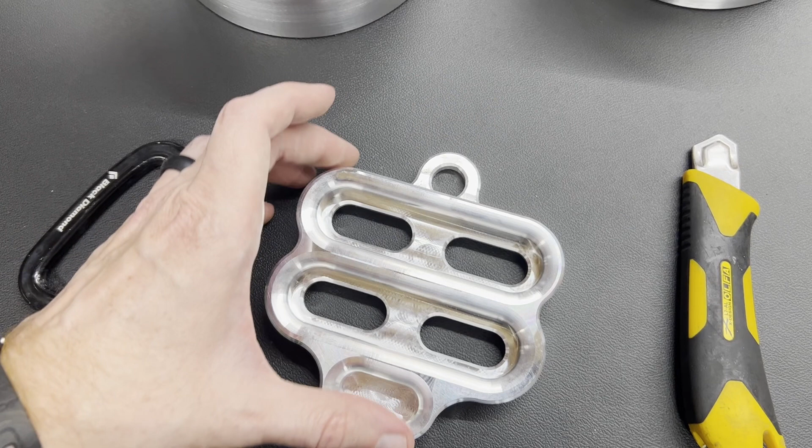So for the latest, I've got, and this is shining a lot, so a lot of glare. That's much better. Okay, so I have the new pinch trainer. So I explained this, but just with a CAD model. So if you clip into this eyelet here at the top, you have one edge to a mono here, and then two more smaller edges on the other side.

So I know that these are an 8 and a 6. It's escaping me off the top of my head. One of these is an 18. I think it's this one, and this one's slightly less. I think it's a 15. But I would have to double check that before I confirm, and this is something like a 25. Generous radii on this side, and then just enough radius on these ones on the other side.

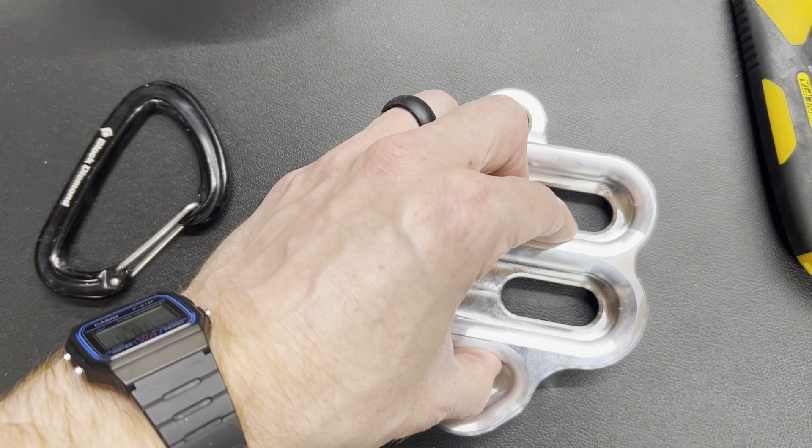So the way that this works is a bit unique. I haven't seen it done before, but you put your thumb in here, and then you have two options: holding here, which is limited by the eyelet, and then you can also put your fingers in here. So you have two different edge depths, and I think those are the most common. But the way that this works is you have these holes in here, which if you've seen my video for the sloper trainer, these work exactly the same, a carabiner goes in either one of these holes.

And a cool feature of this that I have not seen anywhere else is that neither of these holes are centered when you're pinching it. So you have either closer to your forefingers or closer to your thumb. And this is by design. So now I have a regular pinch for comparison. This is roughly the same width as using this outside.

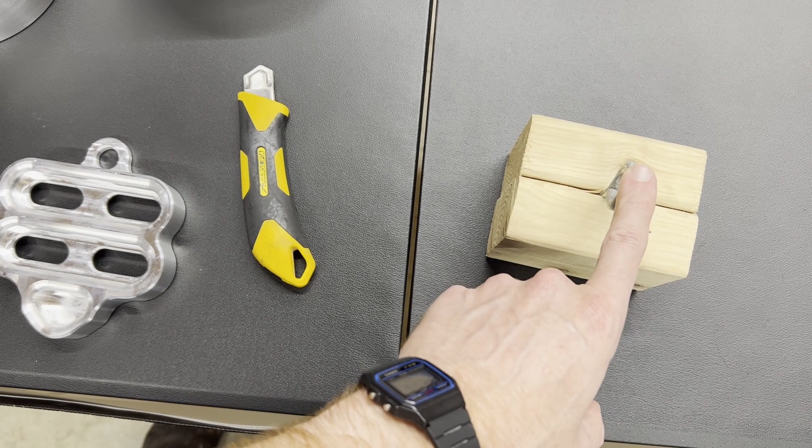So I was able to test this, and mind you, this is not textured yet. So holding on to this is a bit challenging in and of itself. But with this pinch right here, and I tried to hold it at a similar depth as I would hold this, I was able to do 45 pounds, and I could probably do a good amount more, but I had 45 pounds on my loading pin, and that was done easily. Now, first of all, I can't do 45 pounds on this,

and if I am holding between these two and clip into here, I'm able to do 25 pounds. And again, I'm not micro loading it to figure out my exact PR, but it was 25 pounds. If I do it by clipping into here, I was able to do 10 pounds. So, no way could I do 25 pounds clipped into here. Now, that's important because when I do that 10 pounds, I'm feeling it the most in my thumb, more than any of the other tests that I did.

So it's the least amount of weight, but I'm working my thumb the most, which is amazing because one of my biggest complaints about pinch training is that I feel like I'm still just working the regular four fingers, and I wish I knew the name for this grouping of four fingers, but you get the point. When it comes down to pinching, the determining factor for me in most cases, especially outdoors where you're doing a kind of weird pinch, is that you have to activate the thumb a lot, and when I'm pinch training, I never feel like I'm using my thumb to its fullest extent, and I'm still relying mostly on these four fingers, which kind of, what's the point?

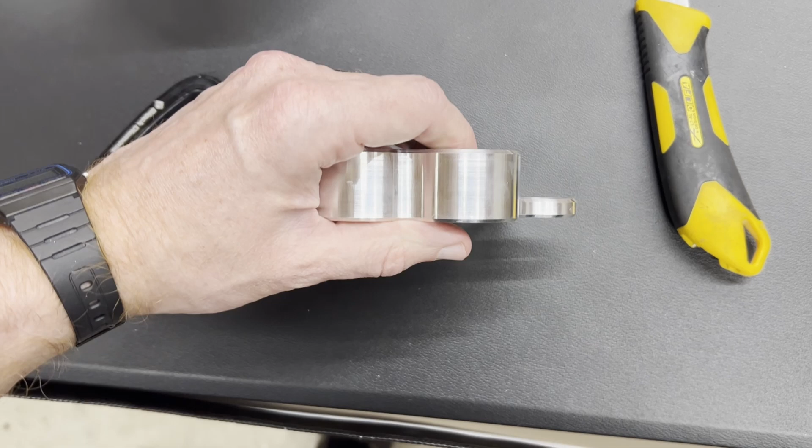So deadlift day and pinch training day is how I like to do that workout split. And this really makes that training philosophy even better. So that's why I designed it. That's how this works. And I will point out that the eyelet position on this is such that when you're using these holds, and this is especially nice for the mono, this will tip, it'll be this way slightly.

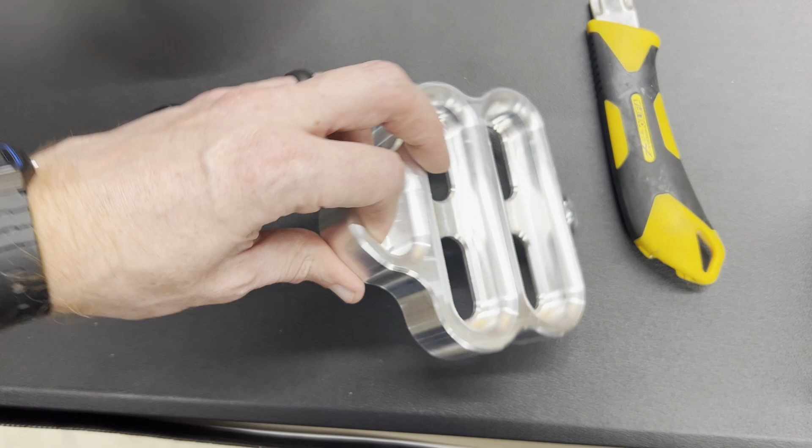And so that kind of makes it so these are all more comfortable. They slope away a little bit, which makes these two perfect for open hand and also the 3-finger drag training. And so this device is the first one in the line that really has holds that are specifically for the drag position. So it's kind of a neat feature that you get your pinch training, a mono, your drag positions,

and then obviously the eyelet on this side is closer to the face. So that will keep these holds, the edge will be perpendicular to the ground. So for these small edges, they'll still feel nice and as in-cut as they can. So you can do these 6mm and 8mm holds. And I was able to test that today and they work quite good.

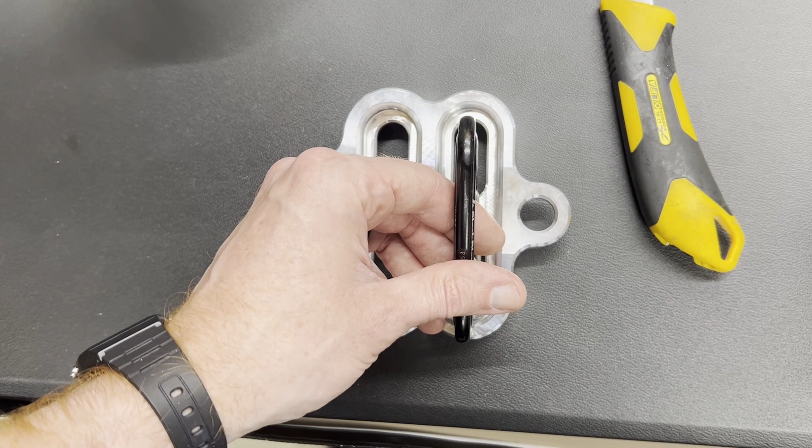I might make these slots a little bit less wide. They didn't get in the way, but the width of a carabiner is usually much less than that. So they don't need to be so wide, and I could get away with them being a little bit less wide. They might need to move out a little bit to accommodate larger carabiners.

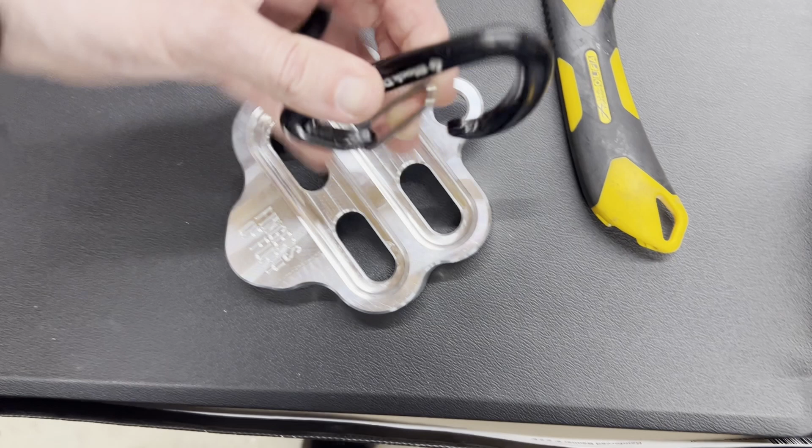This carabiner will work, and I can demonstrate that now. So that's pretty easy. That's how that works. The carabiner just snakes in between these two slots, and it works for both of them, obviously. And I tested that on this. I think these are probably for climbers the most common shape of a carabiner we'll see, they're on dog bones, and this is what most places sell. I feel like they all look the same.

And also these carabiners work, but the typical carabiners that you'll see for workout equipment also work in this. The ones that haven't worked for me yet are the locking carabiners, which I have seen some people use. So it's not a huge detriment that these are this width. So I might have to keep them this way to keep it a smaller package.

So right now I have this down to 14 ounces. So anytime I go up in thickness here or in width, since these are aluminum, the detriment of that is that it easily becomes kind of heavy quite quick as opposed to wood. So this is under a pound. It's 14 ounces, so that's 2 ounces under a pound. So it feels beefy, it feels nice in the hand, but it's not too heavy. And so that's it for this.

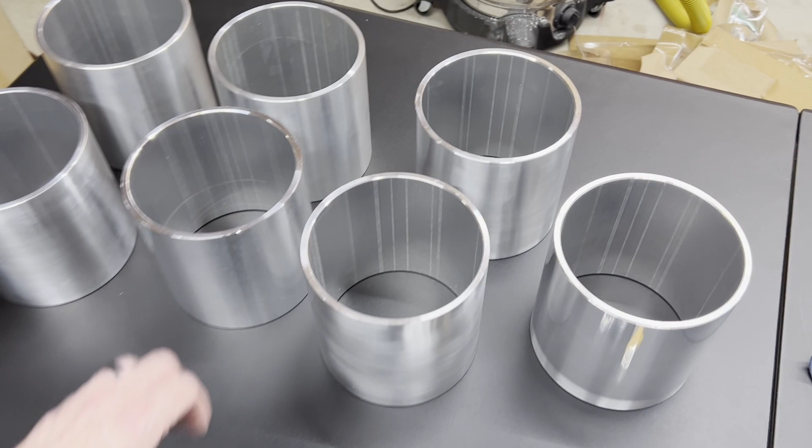I've got 7 tubes. I had a video earlier that the surface finish of the tube as extruded wasn't great. So what I did is I took these down in a lathe, turned the outside, turned both faces, and chamfered it. So without a CNC lathe, I just used a manual lathe.

That's labor intensive, but that does allow me to do a test where I'm probably gonna give one away and then sell the rest, and I'll see how fast they sell. If they sell really quick, that will at least give me some idea that these might be popular, and maybe I need to bring a CNC lathe in here so I can do these more effectively. But if they don't, then no CNC lathe, I won't worry about it, and you'll never see them again.

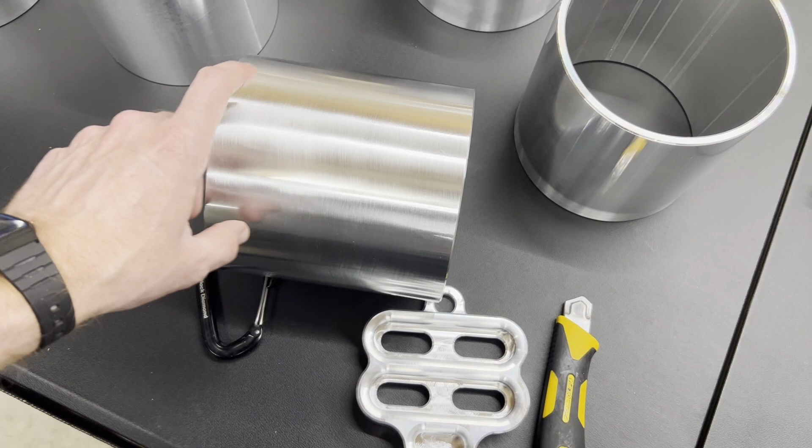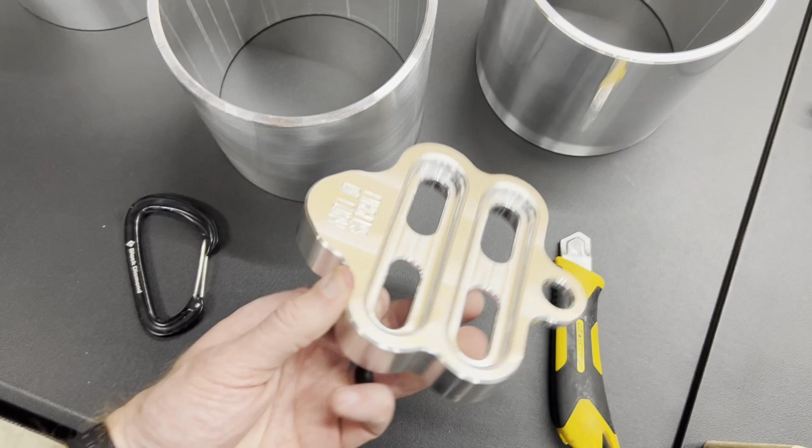But for those who didn't see it, I cut these similar slots into this, and I'll put a little logo on here. I need to come up with a new logo for these actually, because there's not much space to put a logo on these. I know obviously the surface area is huge, but I only like to mill a small flat here and put a logo here. So probably just do like 3 letters, but I need something because right now it's the full name. I don't have nearly enough space for that unless I get a laser engraver and I can engrave on an uneven surface.

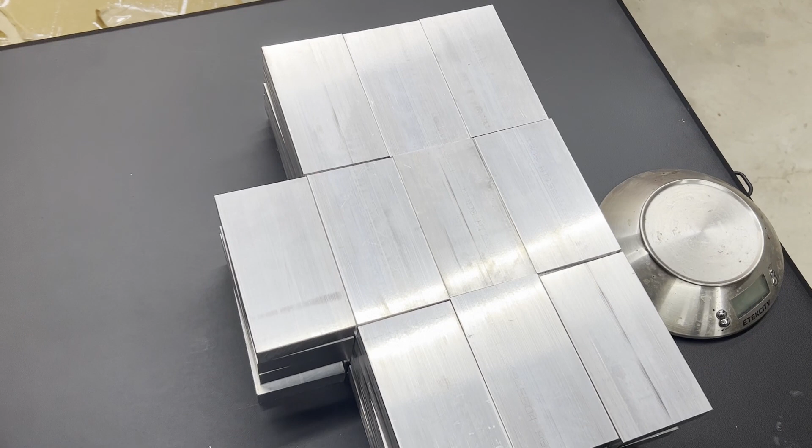So then the next thing, the important thing, is that I've got 50 pieces of stock for Baby Boss boards. So that's these right here. So you'll see those coming in soon. And then the last thing, which I'm gonna move over to the computer and show you there.

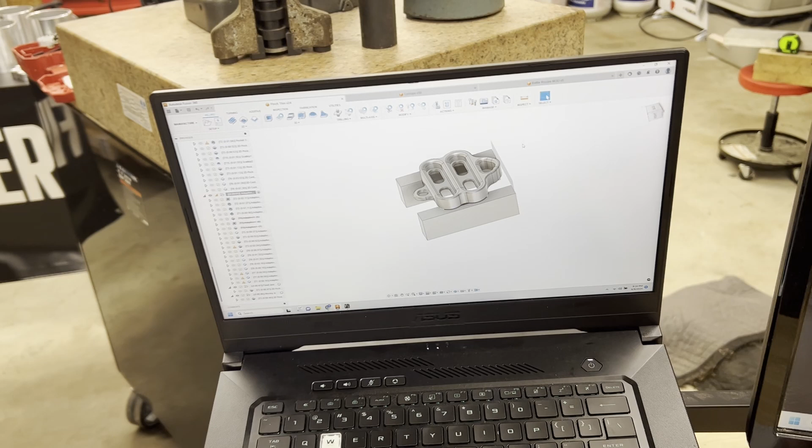All right, so I'm back on the computer, and I apologize, that's just the camera facing the computer and I'm not screen recording, but let's do this. So this is just the setup on the machine. I made some soft jaws for this part because this is an uneven surface and they don't lie in the same plane, so I had to make soft jaws.

But what I want to show you is, and I apologize, you can see some of the messy garage as I'm getting ready for a new compressor and some other stuff in here.

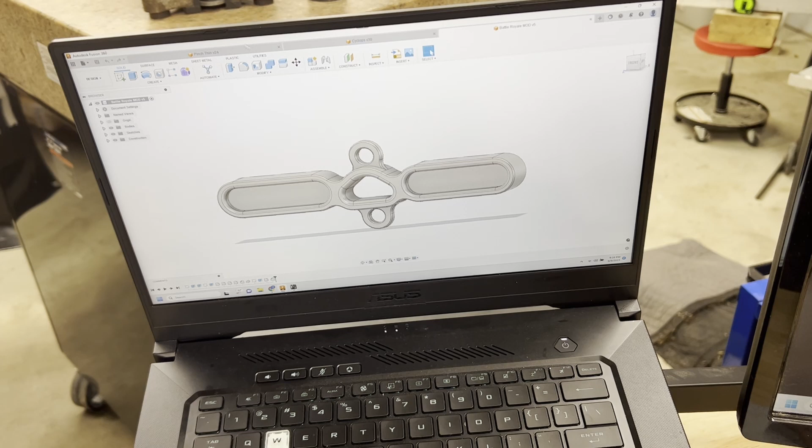Okay, so this is what I am right now calling the Battle Royale. This is another portable hangboard, and I'm hoping this will be the last portable hangboard I do until I want to get a regular hangboard design done. But so this is the Battle Royale.

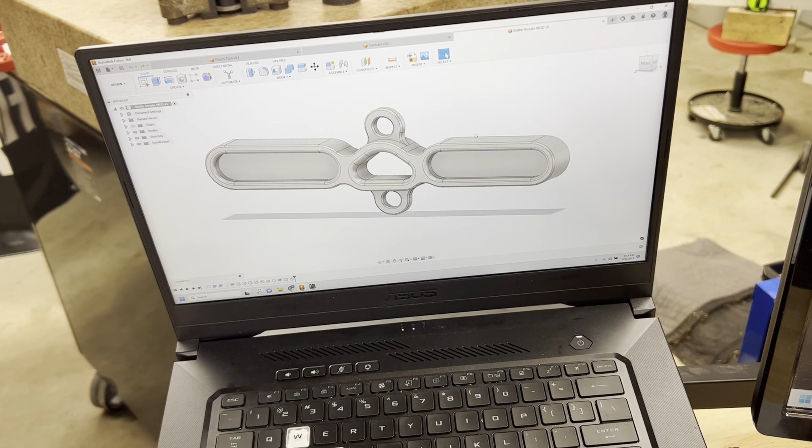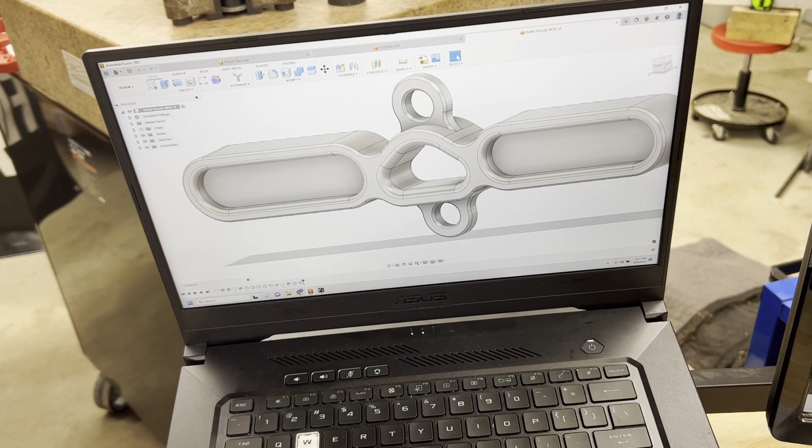It'll be four main holds. As of right now, you can see one this side, one this side, but what I have to do in the finished design is, as you can see, there are 2 eyelets, so you can 180 this, and you'll have a different edge here and here. So you'll see a pocket, to let your fingers sit a little bit deeper on one side versus the other. So that'll give you 2 per side, there and there.

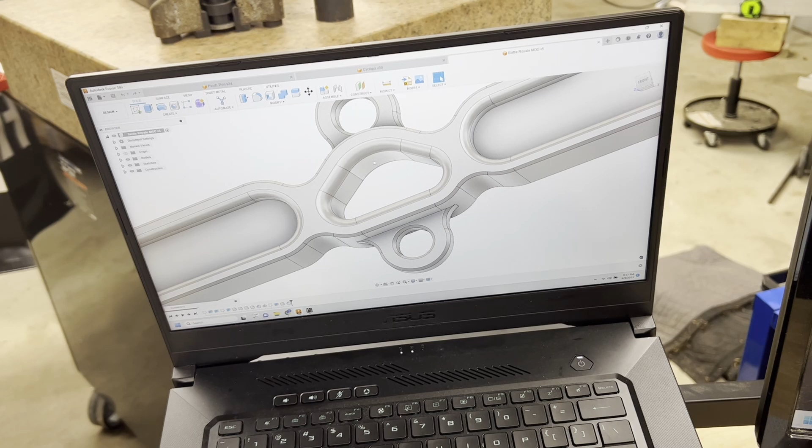But then you also get bonus is a 2-finger pocket and a mono here. So that's another 2, so that's 6 total. So it's a Battle Royale. If I remember right, it's an 18 or a 19 millimeter pocket on one side, and then you'll have the smaller depth pockets you can see here. I think this right now is 8, so probably like an 8 and a 6.

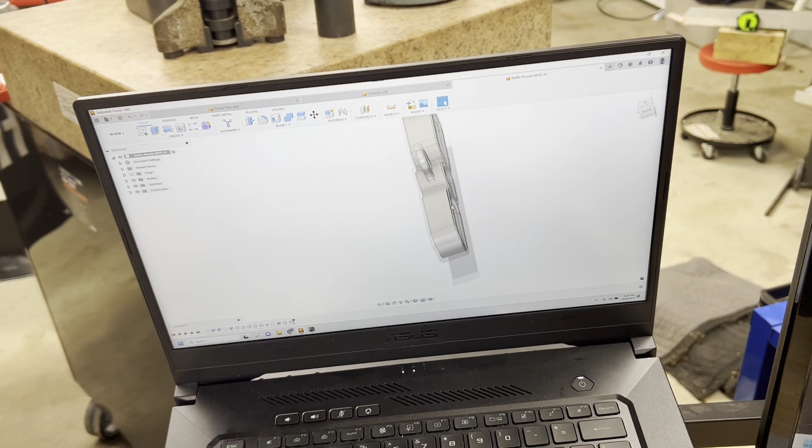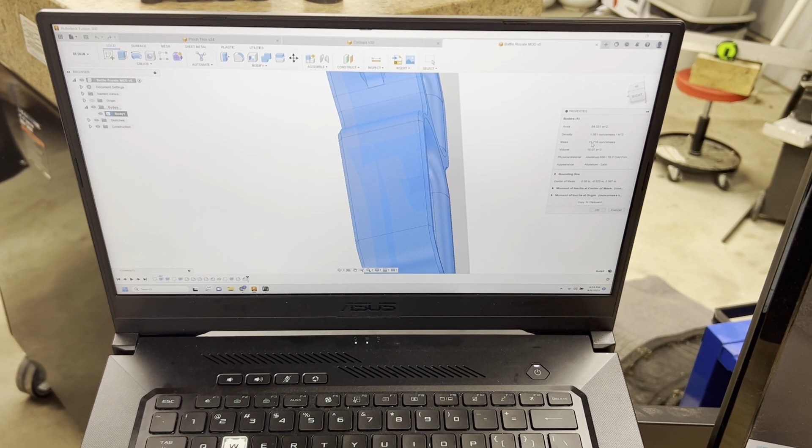And if I creatively make those pockets, I might be able to bring this down another 2 millimeters or so, and that will bring the weight down as well, which is nice, because right now, if I look at the properties, I am at 15 ounces. So this is just an ounce heavier than that pinch I just showed you. Whenever you take the thickness down by just a little bit, it has a profound effect on the weight. So it could be even less, but that's less than a pound, with 16 ounces being a pound. So carrying a pound around is not that bad.

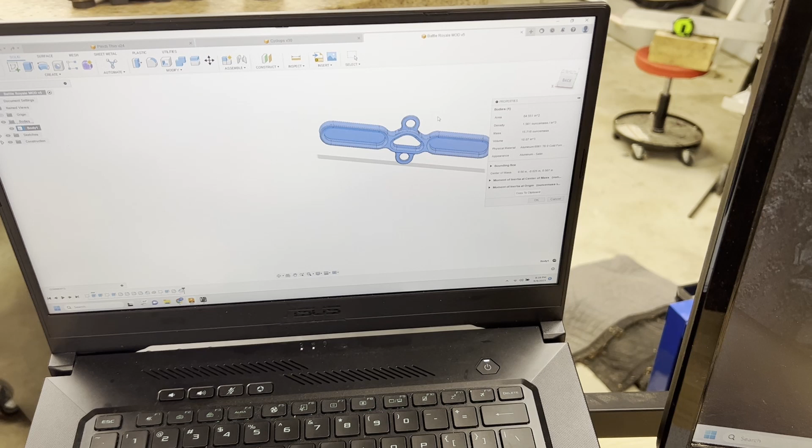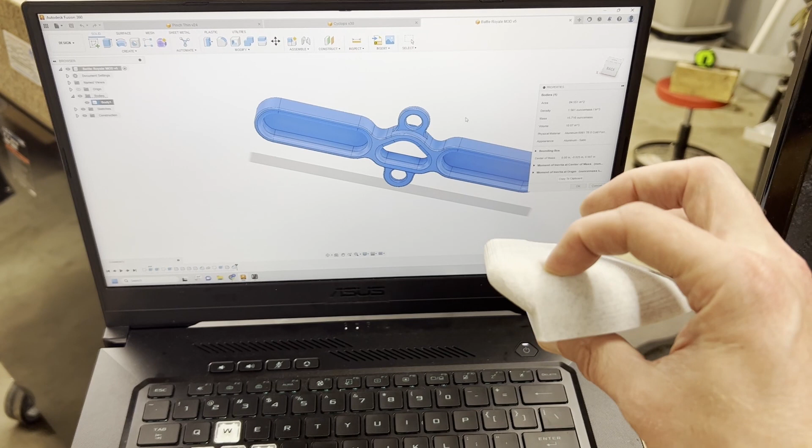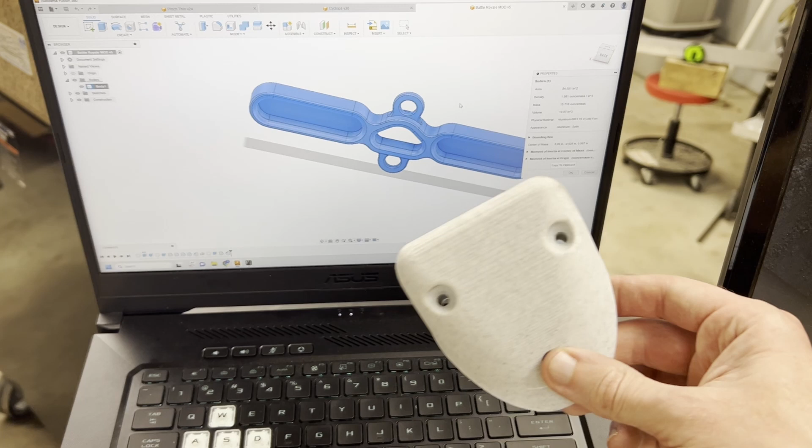So that's that. And while I'm here, I remembered I spoke to people on Instagram about doing a video on 3D printed holds, and that's something I'm going to have to get screen recording software to do. But here's an example of a 3D printed hold that I did during COVID. I see a lot of people 3D printing holds. Some of them do it with success, some of them don't. A lot of people write it off because they'll make a design that looks nice, then they'll use it and rip it off.

Materials wise, this is out of PLA. Everyone thinks you need to use PETG, but that's not true. If you look up a technical data sheet for PLA, if you can find one, a lot of PLAs don't have it. For most stuff on Amazon you won't see a technical data sheet, but you can find technical data sheets on the polyurethane that rock climbing holds are made out of. It's really similar to PLA.

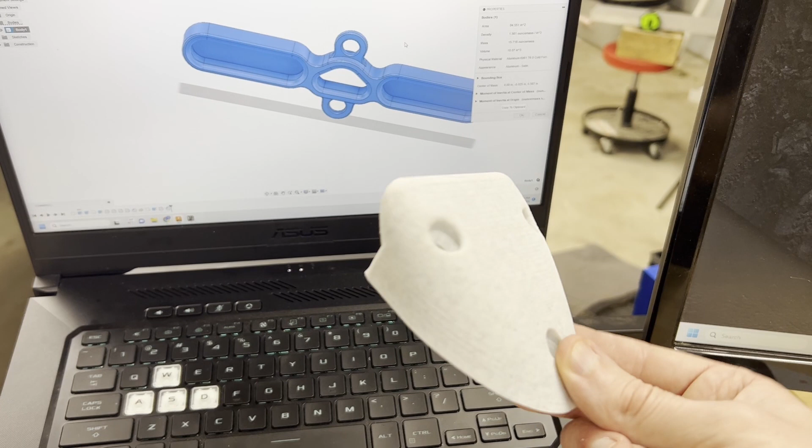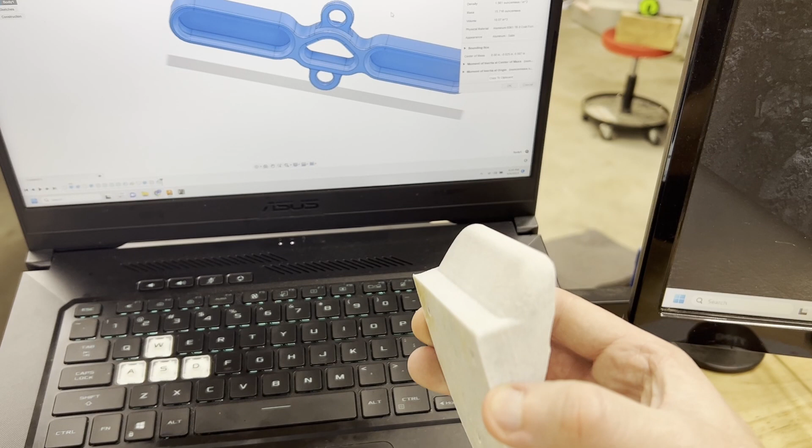PLA, if you're using it outdoors, you have an outdoor wall. These were outdoors actually for 2 years, but usually under a tarp and on a 45-degree wall, so not in direct sunlight. If these were in direct sunlight, that would be a problem for sure, but this is definitely a viable option for holds if you're into it. I want to release some designs. I've lost all of my previous ones, but I did have quite a lot of designs, some better than others, but all of them strong.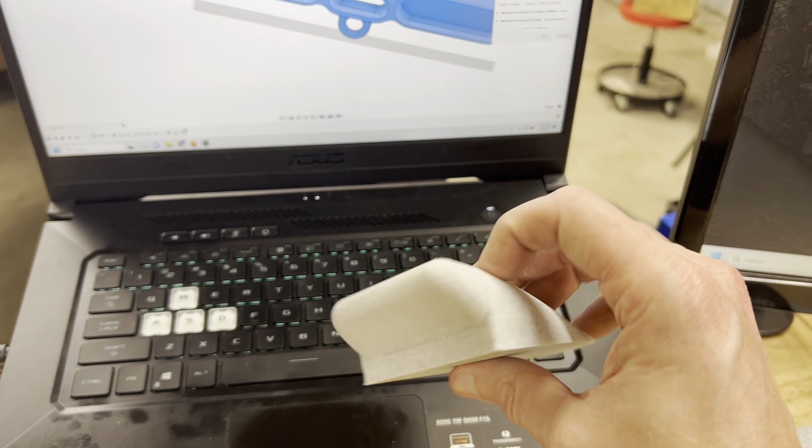And there's some tricks to making these strong, both in the design and in the slicer settings, some simple tricks like location of the screws or bolts that you're using, and how you're printing it, orientation and stuff, which I think people get the basics down.

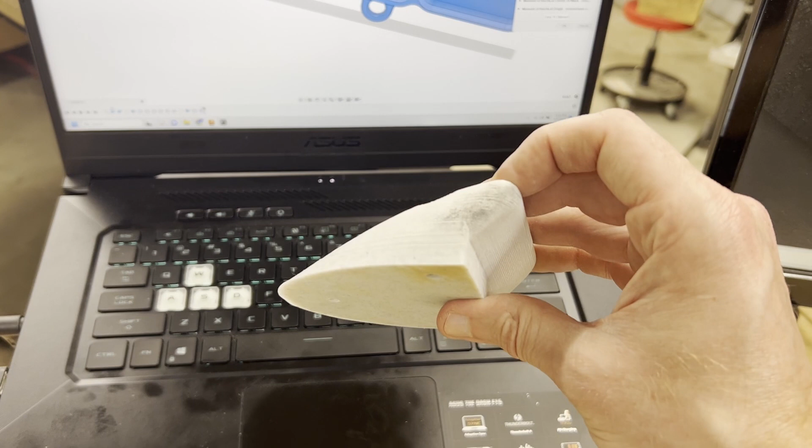But again, I've had this hold for 3 years, and I usually hover between 180 and 200 pounds of body weight, and I can 100% swing off of these. You can see there's some toe rubber in here. I can toe on these really good, really press into them, and not a single 3D printed hold has broken for me, and I don't think a well-designed 3D printed hold ever will on me.

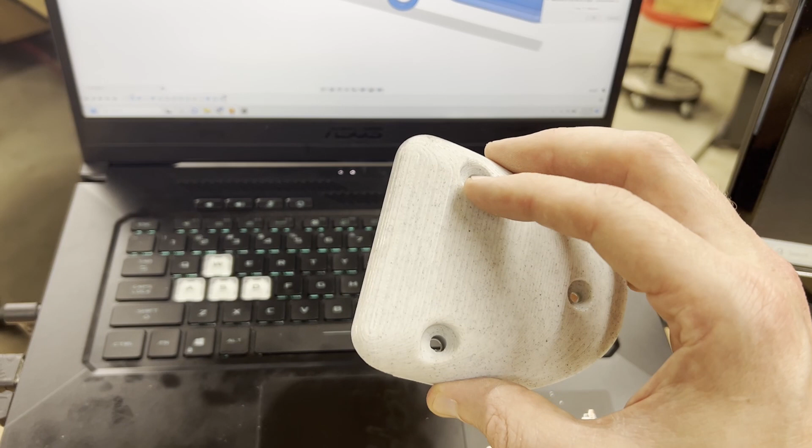And again, there's some things that could be better. If you could get some metal inserts in here, that would improve at least the reusability. On a spray wall these are perfect if you don't move them a lot, but having a metal insert in here like you'll see some people put in wood holds would be an improvement. And you can buy those, but it's something I could go over in its own video. So that could be something to come in the future. But that's it.